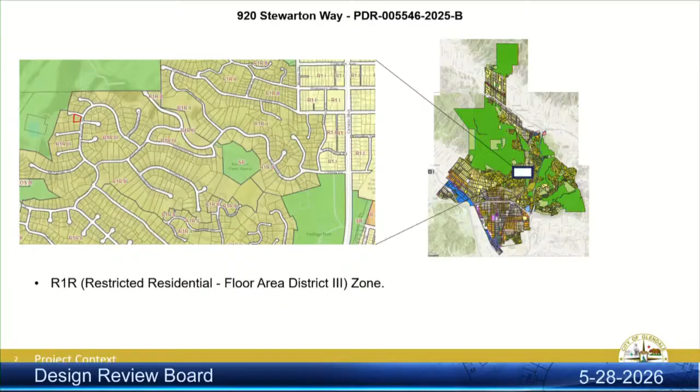Again, this is a 13,075 square foot corner lot. We're located at the southwest corner of Stewarton and Old Phillips Road.

The site slopes downward. We're in a hillside zone. It slopes downward in two directions, toward Old Phillips Road from west to east, as well as away from Stewarton Way from north to south. The average current slope of the subject property is approximately 27%.

On the site currently is an existing 1-story, 1,950 square foot residence developed also with an attached garage, both of which were built in 1974.

This project proposes to demolish that home and construct a new 2-story, 4,788 square foot dwelling with a 690 square foot detached 3-car garage located downslope on Old Phillips Road.

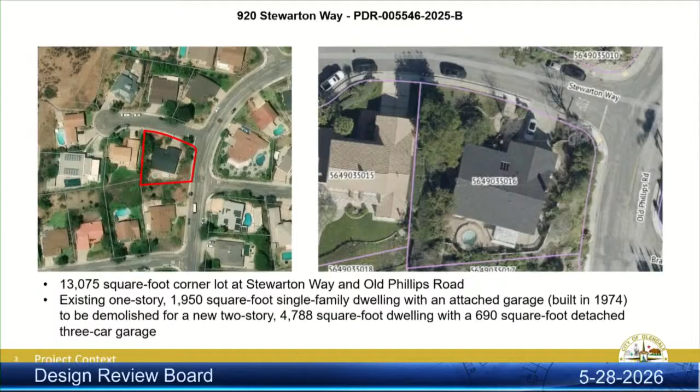I showed these pictures at the initial DRB hearing. Again, these give a little bit of context of how the site is currently developed. You can see the residence, located on a graded, kind of flat pad that's pretty typical of this surrounding area.

I'd like to mention, too, that this is a second review for a final decision. This project was initially heard and reviewed by the Design Review Board on February 12th, 2026, and the DRB voted 3-0 that the project be returned for redesign.

We have the following conditions outlined on the screen here. Number 1, step back the second story and parapet 3 or 4 feet on the north and east facades to alleviate the monumental appearance of the residence. 2, follow the existing topography by reducing the overall massing and roof height as the site slopes downward to the east. 3, lessen the massing of the entryway form facing Stewarton Way.

4, comply with all the conditions and recommendations outlined in the correspondence received from various city departments and divisions. 5, provide a decorative driveway with permeable paving materials. And number 6, limit exterior lighting to entryways and pathways, and include a note on the plan stating no under-eave or soffit lighting is proposed.

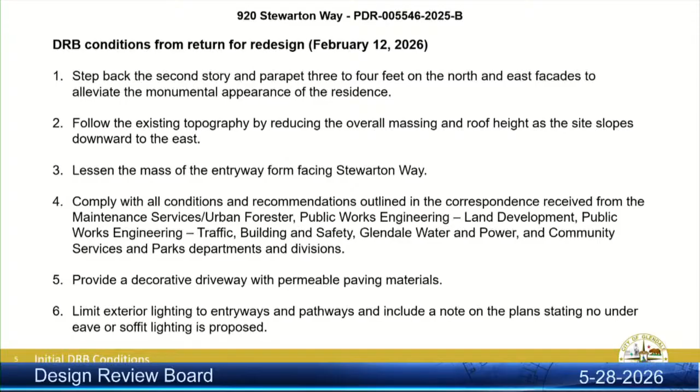The way I want to frame the rest of the presentation is to show what the DRB initially reviewed and what is currently in review for this project.

Here's the garage and storage floor plan. No changes are proposed to this floor plan. The DRB reviewed the proposal and noted that the detached garage, while not typical of the surrounding neighborhood development, is appropriately located on the site.

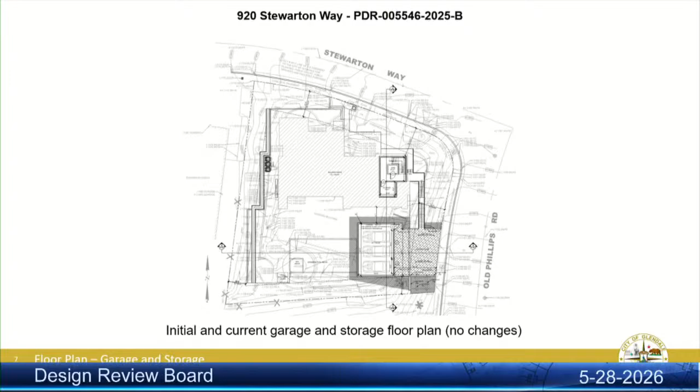Here are the changes or differences in the second story floor plan. The notable difference is just how the walk-in closet space at the top left quarter of each image has been altered and changed. It has been stepped back a little bit, specifically on the Stewarton Way elevation on the north.

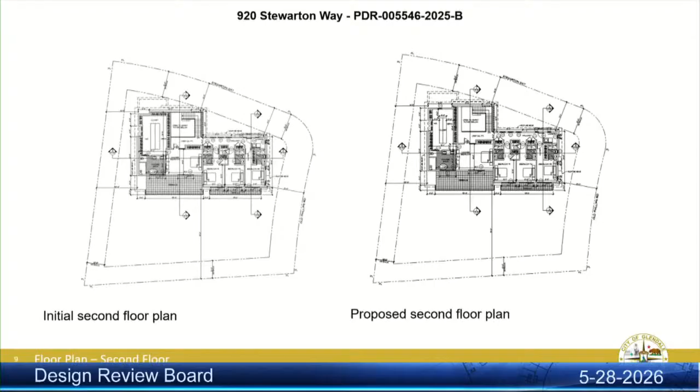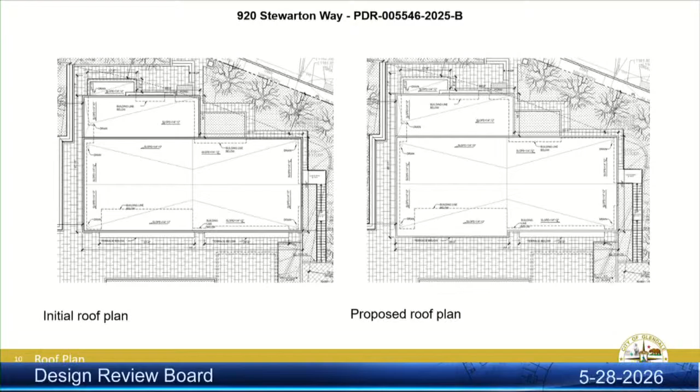And then here are the changes to the roof plan. Again, very few changes. With the proposed roof plan, it just mostly projects over that second story terrace that services the master bedroom.

And then here we can see the street elevations. So north is Stewarton Way, east is Old Phillips Road. Not much of a difference in terms of the massing and scale of the project. It has been given more proportionality.

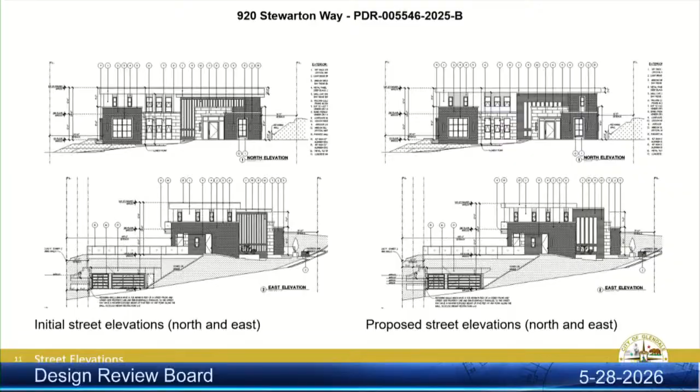The board noted some concerns with the vertical glass members or panels, specifically for the entryway form. Those, as well as the fenestration pattern on the residence, have been given a more proportional, balanced aesthetic in order to soften the appearance of the residence when viewed from the street.

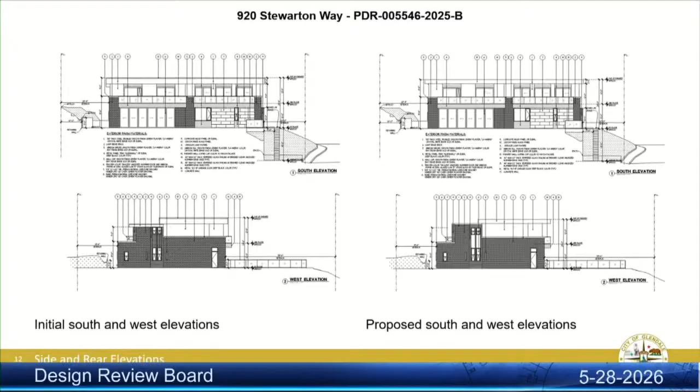And then these are the proposed and initial south and west elevations. South is the rear facade of the house. Again, very few changes have occurred. The board noted no major concerns during the initial DRB hearing about these facades.

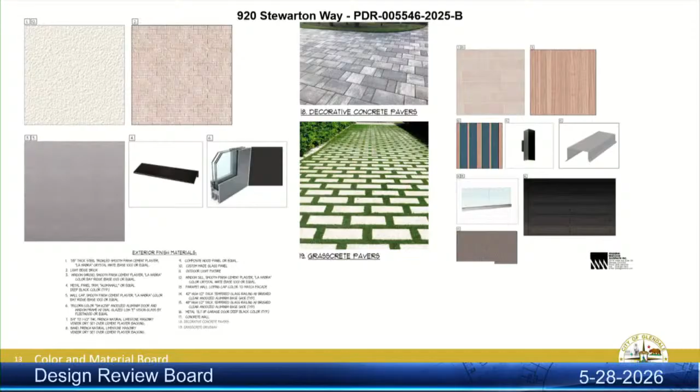And then here's our color and material board. It's generally the same as before. The only difference is that the applicant has provided us more information about the decorative paving materials for the driveway, which are going to include concrete pavers as well as grasscrete pavers.

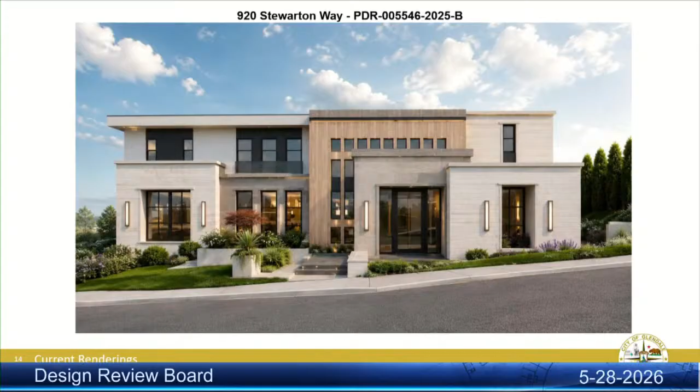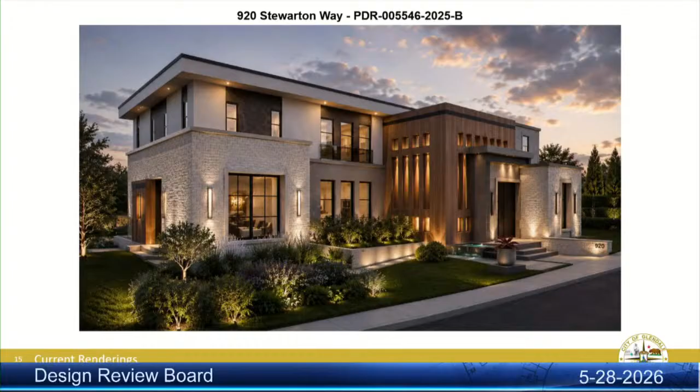And then this and the next couple slides are just some current renderings that the applicant has provided. He provided these yesterday. So this is the facade of the home on Stewarton Way. And then here's more of a three-dimensional view of what that updated facade is going to look like.

And then this should indicate draft conditions of approval for redesign, but two of the main concerns that staff still notes with the resubmitted plans is that the overall massing of the project still doesn't relate to the existing adjacent buildings and does not follow the sloping topography that's evident throughout the neighborhood and on the site in general. And then in terms of scale and monumentality, there's still a box-like massing concept that doesn't properly fit into the surrounding neighborhood context.

To address this initial condition, the height of the building was reduced, from what I see, by 6 inches by reducing the thickness of the parapet. Staff does not feel that this has necessarily addressed both of the concerns noted on the slide.

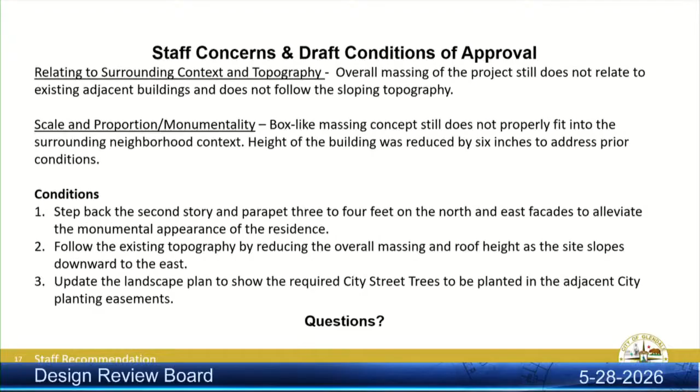So again, to clarify, staff's recommendation is that the project be returned for redesign and provides the following conditions. One, step back the second story and parapet 3 to 4 feet on the north and east facades to alleviate the monumental appearance of the residence. Two, follow the existing topography by reducing the overall massing and roof height as the site slopes downward to the east. And then three, update the landscape plan and show the required city trees to be planted in the city planting easements, just because this was only provided on the site plan.

This concludes staff's presentation. Also to note, no public comments have been received regarding the current proposal. I'd be happy to answer any questions you might have.

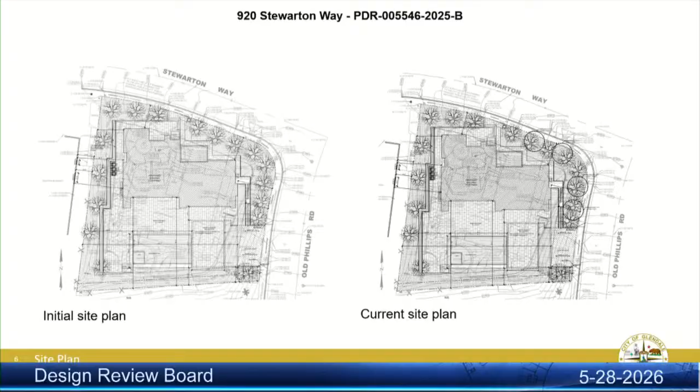But it's very much common with the next home right next door to it. We're not doing anything odd or creating a wall here. This is part of the architecture, and architecture is not a mandate, it's a creative profession. It doesn't mean you have to repeat the roof next door to you. This is the approach we took for this one.

What we have done after the last DRB meeting, with the comments back to us, we made it a shallower roofline. We pushed the balcony back, creating the balcony on the second floor so it recesses a little bit. If you look at it, there's a glass railing in front of it, which we didn't have before. We lowered the entry form and changed the proportions of the openings.

Also, we've changed the entrance a little and lowered it a bit more. But discussing with the family, as an architect I didn't feel like reducing it too much because it would start losing the form of the architecture. It would read as a completely different story.

If you go to the renderings you were showing a minute ago - this is where you can see the balcony up above. Next rendering please, so this is what is being proposed.

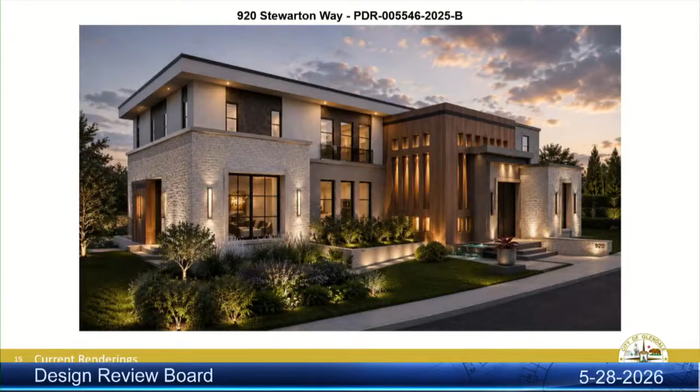With this we do have a balcony railing in front of it, and you can see the forms are basically terracing, going back and forth. But that roofline, in my opinion as an architect, needs to be there to collect the entire forms and bring them together as one unity.

We also added wood material between the windows and at the ceiling of the canopy, so this may enhance it a little bit. In my opinion, this is just an alternative one, as an option.

Alternative two is what my client prefers to have. A young family, they want a contemporary home to be lived in, more like an open plan. If you look at the floor plans we provided, there are retractable doors that could open up to the outside, so inside becomes one. That's all.

I think most of the conditions given to them, like landscaping and public works and trees, this is all agreeable. Any suggestion, we're ready to work with it, but this is what we tried to present today, and we're glad to discuss this with you or hear your comments.

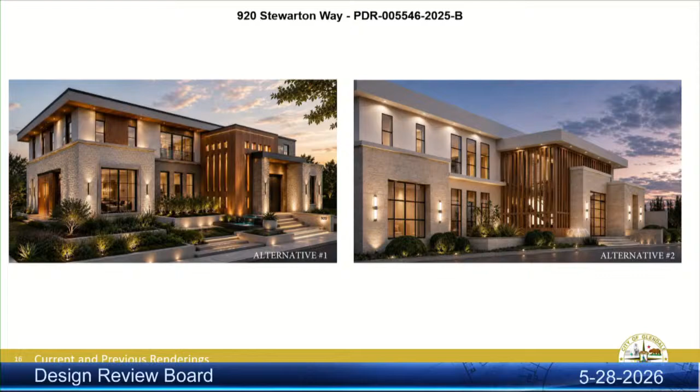Are those just vertical fins of some sort? Yeah, those are vertical fins, with some sort of storefront behind it. There's glazing behind it, the glass is sitting between those fins. I think we provided the detail in the packet that shows how it's framed.

Where would that be in the packet? It was on the original submittal, not this current one. Oh I see, so that we did discuss, and if I recall correctly, it's not behind the wood element, it's in between the wood openings - the glazing, correct, between the wood.

The vertical elements are like mullions, but thicker ones, like heavy vertical timber. Yeah, heavy timber type. I have no other questions at the moment.

Additional questions? Yeah, I just want to get some clarification. In both of these scenarios, one of them is alternative number 2 - you're saying the owners prefer that one? Correct, that would really be what they like, basically more of a return to the original submission to the DRB. And alternative 1, did that also get buy-in from the owners?

Yeah, it's within the agreement of the owners, we need to work on it. But this is something we discussed at our meeting, and they kind of agreed to go with this direction too, which does include some of the comments received from the DRB.

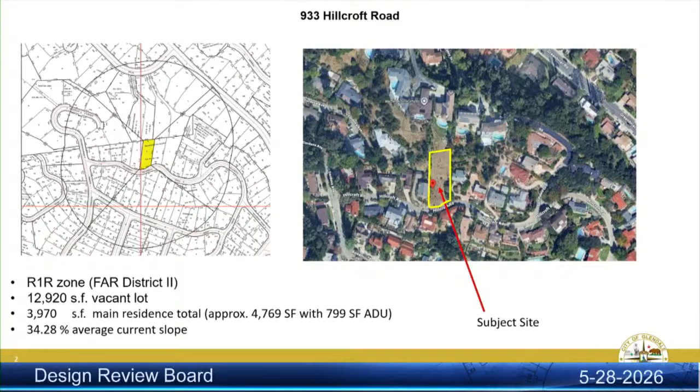The project proposes approximately 2,055 cubic yards of export or grading as part of the proposed project.

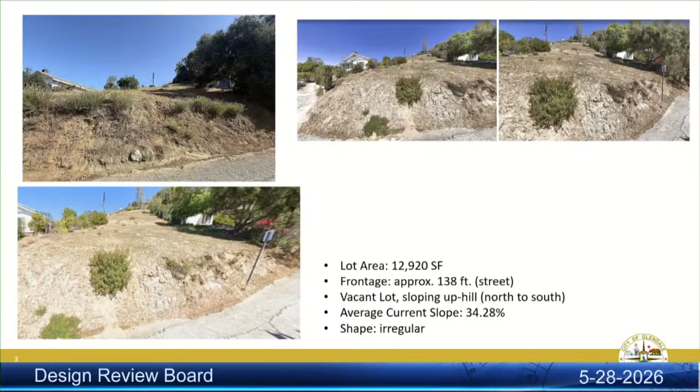The new house is proposed to follow the site's sloping uphill topography, and the proposed site plan reflects this lot's topographical features and grading. The proposed house will be situated towards the center of the lot, following the contours of the site, and then the garage will be placed towards the front of the lot, built into the hillside, following the contours of the site.

The new house will be accessed again from Hillcroft Road, and driveway access to the new detached three-car garage will be from a new angled driveway proposed to be constructed at the front of the lot, set back approximately 18 feet from the street front property line. The driveway features permeable staggered pavers and grass in between.

The overall new building location and garage design are appropriate to the site. New drought-tolerant landscaping is proposed as well throughout.

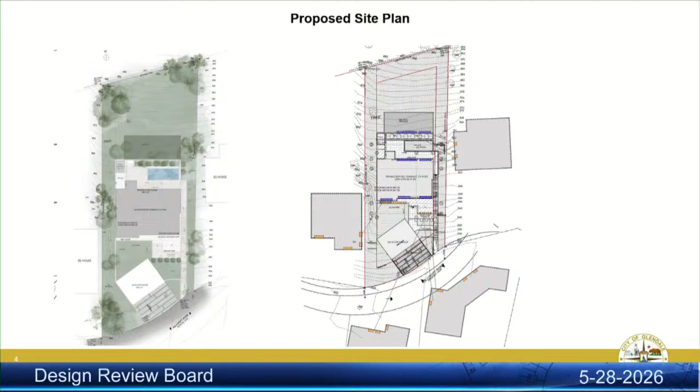Let's move on to some renderings of the proposed project. Again, the new two-story, 3,970 square foot single-family house, proposing approximately 2,076 square feet on the lower level, and 1,864 on the upper level, and the detached garage at approximately 700 square feet.

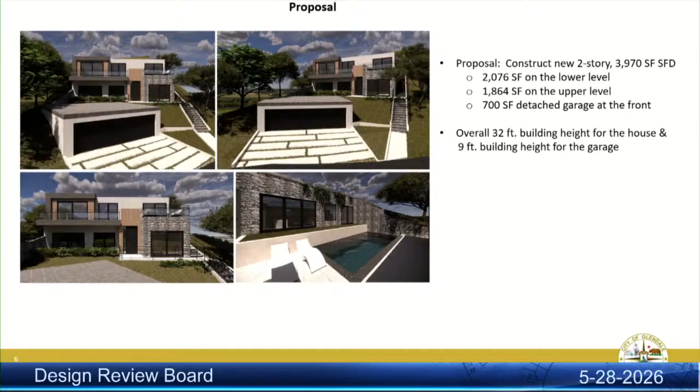Overall building height for the house is proposed at 32 feet in compliance with the zoning code, and approximately 9 feet building height, overall height, for the detached garage.

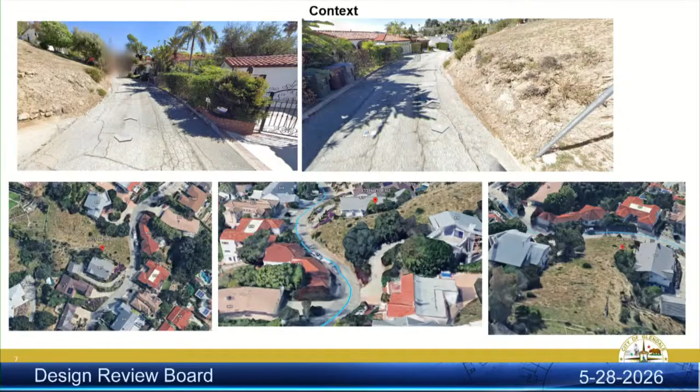A little bit of context of the surrounding area includes both 1- and 2-story homes. Specifically, the home to the west is a 1-story single-family house. The home to the east is a 2-story. The home directly adjacent to the rear is a 2-story, and there are two-story homes directly across the street on the downhill side of Hillcroft Road, but they have a one-story appearance from the street, some stepping down according to the topography.

So this is, again, just a little bit more insight on the context. The house directly to the west on the left-hand side of the screen, the home to the rear on the top right corner of your screen, and then some of the homes directly across the street, as well as the property to the east.

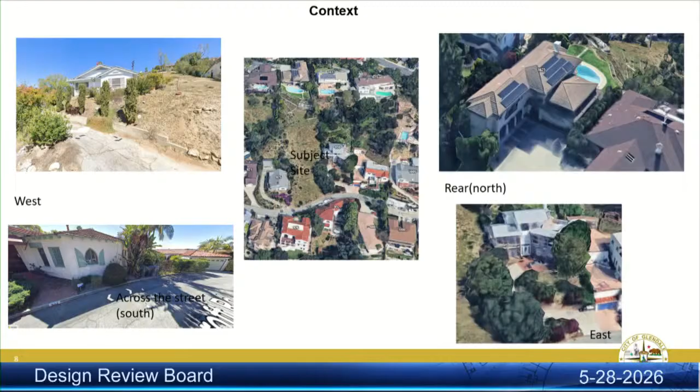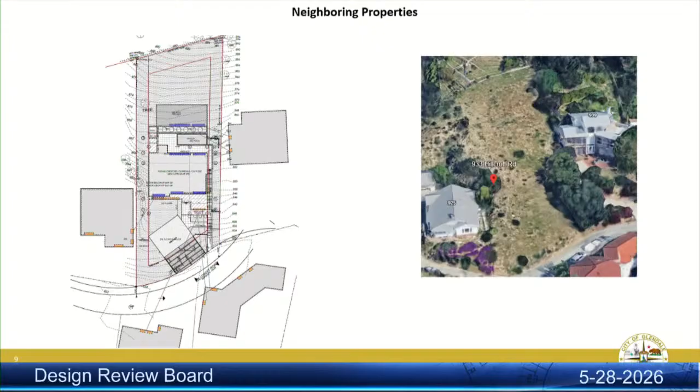The proposed landscaping, which is included in your packet, roof plan, floor plans of the home and the garage.

So in terms of the building form and profile for both the new home and the detached garage, again, it's proposed to follow the existing topography of the site and its mass and scale, again, incorporating transitions into the existing context, including transitioning from the one-story home directly to the west and the two-story adjacent homes as well.

The new home relates to the predominant neighborhood pattern in terms of massing and configuration, and its design and use of materials are also used, again, to diminish its overall size and appearance and scale, especially when viewed from the street. The home's two-story volume is proposed to be placed further up the hill towards the center of the lot.

Away from adjacent residences, and again, set back from the street front property line as well as the adjacent east and west property lines. The street-facing facade of the house is composed of staggered and setback building forms, recesses on the ground and upper floors, and projecting balconies and overhangs.

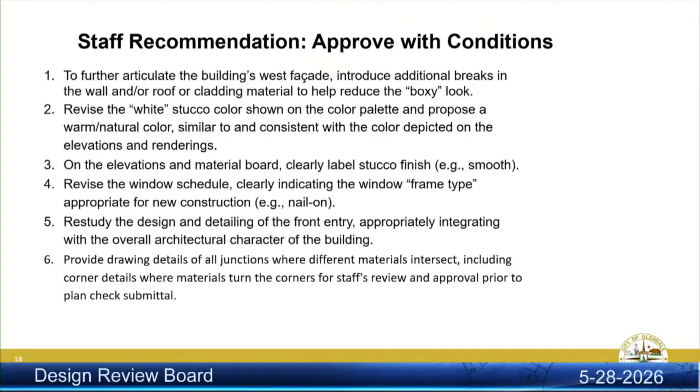Lastly, we did receive several comments, correspondence, emails, and we forwarded all those to you. You also received hard copies of most of them—actually all of them—printed for you, if I recall, and we emailed them to you as well. So with that, I will conclude my remarks.

Just before I finish, regarding the comments, I wanted to highlight some of the concerns. Concerns raised include, but are not limited to, concerns regarding the architectural style of the house being modern or contemporary, not being consistent with the overall character of the neighborhood. There are concerns about drainage, construction, duration of construction, traffic circulation, and traffic associated with the construction or in the future. Also, in general, concerns about particles in the air during construction, etc. So there was a variety of concerns raised, all in the letters that have been forwarded to you. Now I will conclude my remarks.

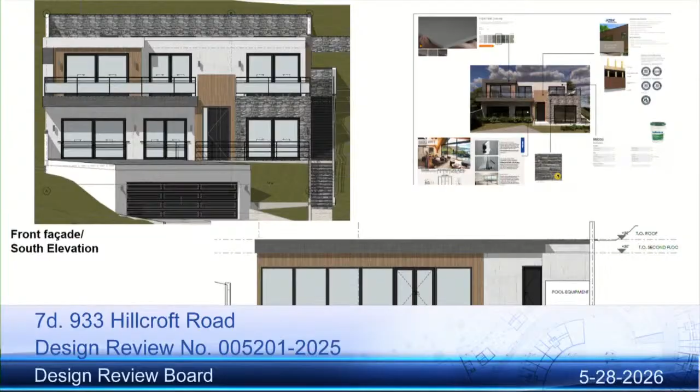Okay, because it looks to be more of... let me go to that section really quick, give me a minute, to that elevation. So on the top left corner, that sort of tile element, it just appeared to have that look and dimension and depth, but again, I'm going to defer to the applicant to clarify that point.

And just staying on this material board sheet, the condition particularly about the front entry - is staff's idea to create more of a distinctive entry point? Well, it seemed to have some sort of an awkward transition between the siding above the entry and just sort of randomly where it's terminated.

Understood. Still important to highlight the focal point entry as noted by the guidelines, but properly incorporating that. Again, that's why staff noted it to be something to restudy and give the board some thought on how the applicant can achieve that appropriate integration. Okay, thank you, I have no other questions.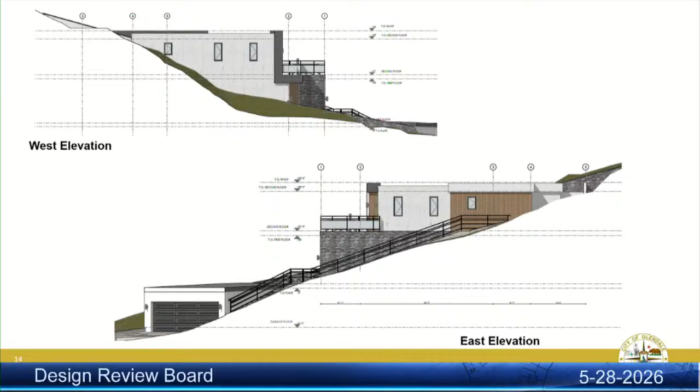We have no problems for the window frame. The left facade design is a little challenging because it's also partially a retaining wall. This lot was very hard to develop because of the limits of the retaining wall height, due to the huge slope, and as you can see, part of the living room, kitchen, and dining area is partially in a basement. For the building not to have that massive look from the street and not be visible from the neighboring properties, not to be outstanding from the street - there are no visibility issues for neighbors because it's, we can say, buried in the slope.

The drainage concerns will be addressed by our hydrology report, which we're going to provide during the building plan check. We already have civil and drainage plans in the area of our development provided in the C sheets in the package. The drainage issue is going to be better with this development than without it, because the lot is currently vacant and there is no maintenance there. We're proposing to do more landscaping, and it's going to look more appealing from the street than it is now. I think that was pretty much it, if you have any questions.

Thank you. Any questions? Would you like to go? Yes. Any other comments about the conditions, changing the color and stuff like that? We agree with that. Okay.

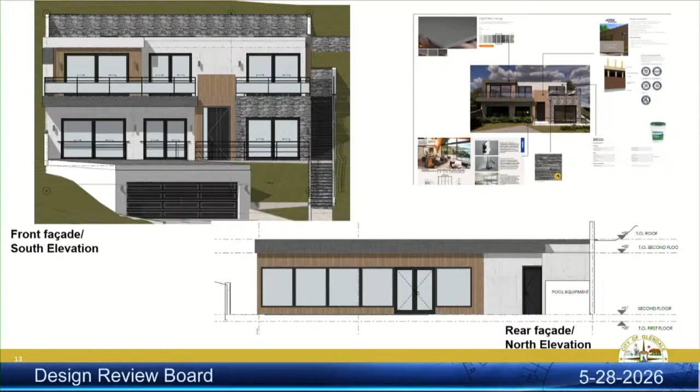The question I had was about, well, first I'll start with the roof at the entryway. Is there no roof above that? Is it just open to the sky? It's a balcony, so the balcony on the second floor is one big balcony. Okay, on the upper level. It's just the parapet goes to siding and then it turns into the railings. The front door is right there in that wall, right? Yes. When somebody is sitting there at the door ringing the bell, there's no roof over their head, correct?

No porch. Just out of curiosity, and this is really neither here nor there, but did you consider putting the living spaces on the second floor and the bedrooms in the buried portion? Yes, but it's harder to achieve that because all bedrooms need egress windows and natural lighting, which we can provide. The living area and the kitchen is one open space, and the natural light and egress is from the street side. But when we put bedrooms, we can put a maximum of 2 bedrooms on the front side, and then the other 2 bedrooms have to be fully buried with no natural light, ventilation, and egress.

Okay, alright, that's it. Go ahead, board members. No, I'm sorry, go ahead. No, I'm done. Oh, okay, so just as a follow-up to Mr. Walsh's question, I can't quite read the grid lines, but maybe staff could hand the presenter the laser pointer.

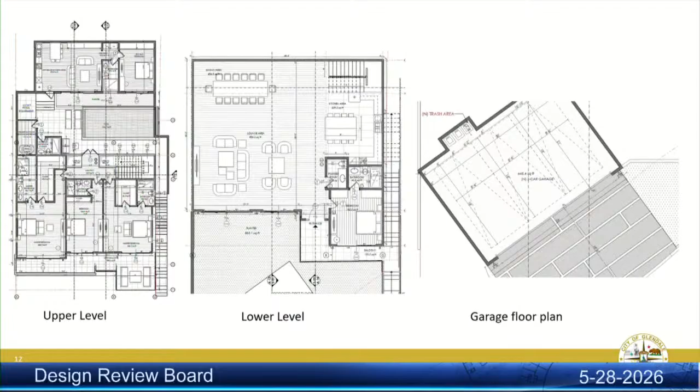And have you looked into the practicality and the difficulty of kind of burrowing that ADU into the hillside and having a live roof, a living, breathing hillside above it? We did, but it's nothing impossible, and the owner really likes the integrated look with the natural slope planter on top of the ADU. It also doesn't look like another structure. Sure, it minimizes the concrete and the stone in the backyard.

So are you proposing a concrete roof as well over the ADU? Because I know the retaining walls are concrete. Yes. I see, so it would be waterproofing, then planter, then connecting to the natural slope. And the roof material over the garage, was it that black, grayish tile that was on your material board? Yes, because the slope is too small for shingle, and for the flat roof we want to make it appealing because it's going to be visible kind of from the street. So we want a nice material, not just a torch-down roof, so it's going to be dark tile.

So two thoughts come to mind. If you're already going through the detailing of creating a live roof over the ADU, have you considered a live roof over the garage, like a planter-ish live roof? Because that would be a really creative, interesting idea. We would love that, but we have a lot of barriers with the height limit and not attaching the garage to the house, so the house isn't considered 3 stories.

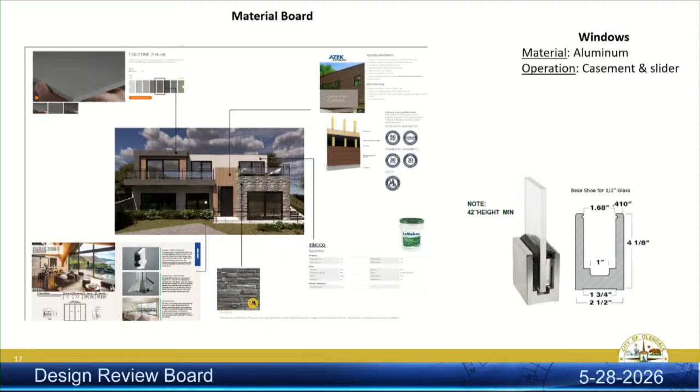So you can't really access the roof over the garage, right? So how do you get to it, like if you had to maintain it? Do you have a site plan that depicts it? It's almost the same level as the entryway, but we specifically put railings to not have access. If you want to, for maintenance, it can be accessed, but we don't want the roof used as a seating area or something.

And that tile that you're proposing, is it like a 12 by 12 or a 12 by 24 tile? It has different variations that we're going to go more detailed into later. Okay, I have no other questions.

So that's more like a paving tile as opposed to a roofing tile? So you still have to waterproof it then? Absolutely. It can be accessed from this side. It's almost the same level as the finished floor, so for maintenance it can be accessed.

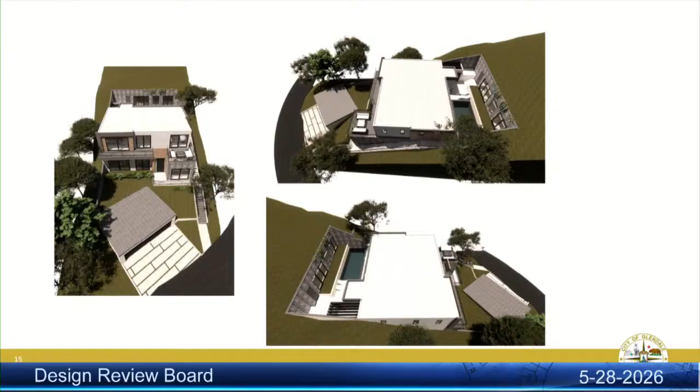Additional questions? No.

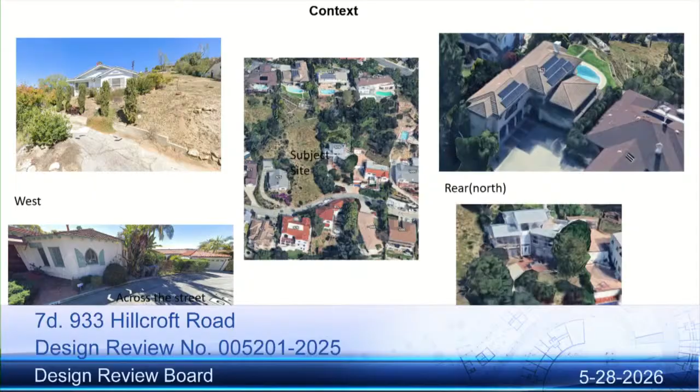The second thing is, while like my husband, I appreciate someone wanting to build a home, I appreciate anybody wanting to build most things, actually. However, I do have a concern that this is not compatible with the surrounding neighborhood and our community. Like Neil mentioned, although we're not in a historic neighborhood, we do have historic architectural styling, and this home does not fit into that.

Other than that, I know the little bell just rang. We are concerned also about fire, life, and safety risks as it pertains to the narrow streets and emergency services getting to us if need be. We are also concerned.